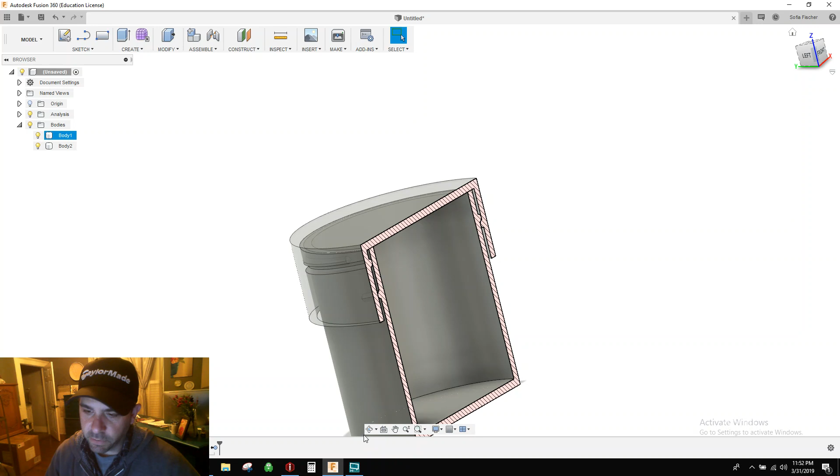So today we're actually going to do custom threads, but using the coil tool in Fusion. But we're going to do something a little bit different, and I'll show you. So a lot of times, when I was doing research on doing custom threads, it was always a positive thread, like say on the cap, and then a negative thread or a channel for that positive thread to go into. And most of my stuff gets 3D printed, and most of those will work a little bit after you do some tweaks and tunes.

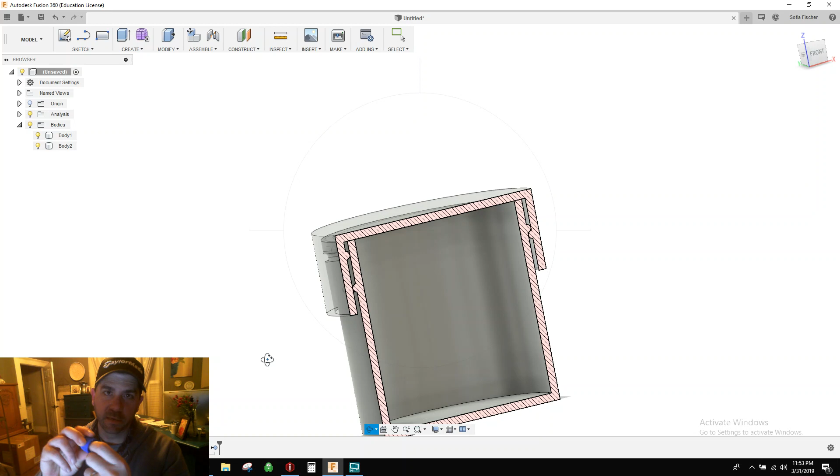But after looking at some threads on like a soda bottle, what I noticed was that both sides, the bottle side and the cap side, both had positive threads. There wasn't a positive thread and then a negative thread or a channel on the bottle side. It's really just two positive threads, and they're threading themselves together. And it makes a really tight seal, makes it a really smooth thread mechanism. And so I'm going to show you how to do that real fast.

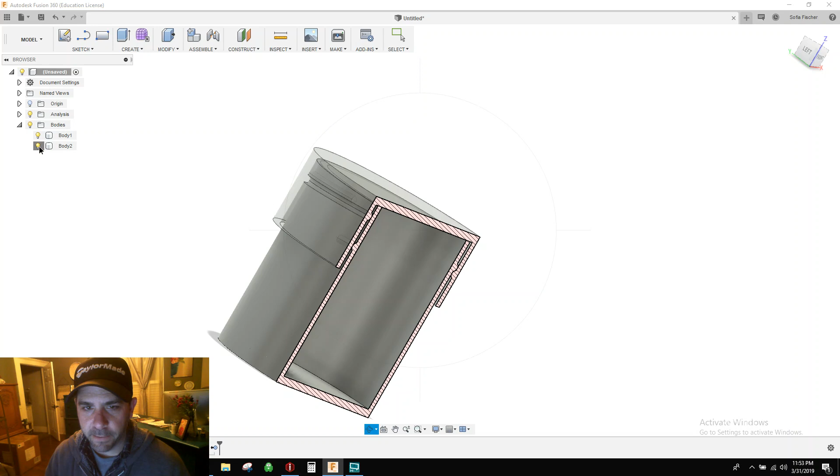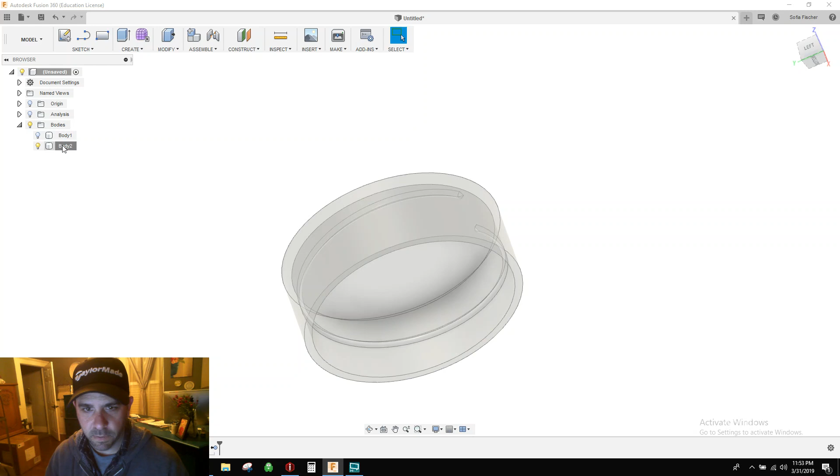So this is just a little test piece I did with a body and a cap. But really, what we're looking at is this positive thread here. So this is just a one-turn thread, and I'll go through the process here on how to make it. So you can see here, this is a positive thread, and then if we look at the cap, let me change the opacity on this. So there you go, and so then you can see that this is also a positive thread.

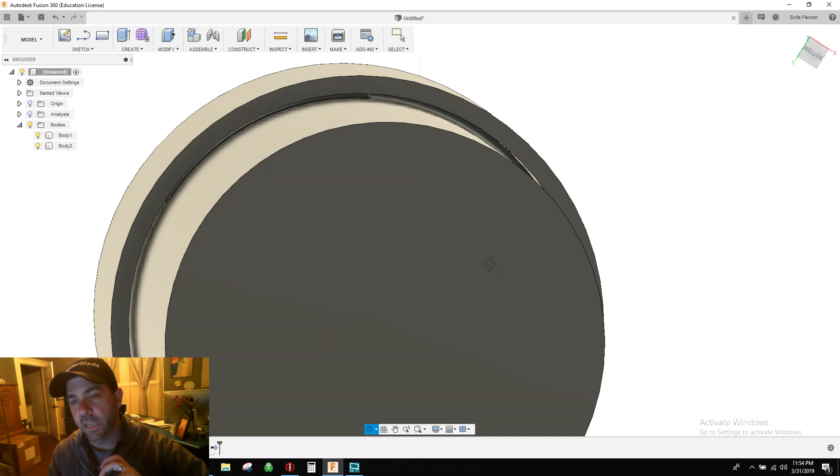And so essentially what I've done is I've just scaled these two, or sized them, so that the outer cap fits completely over with a little bit of space for the threads. And it's not a super snug fit from a cap and bottle perspective, but what gives it that snug fit are the threads really wrenching it down and keeping it together, but it makes it easy to come on and come off. So here we go. We'll just start a new one. Like I said, this is going to be a quick tip and sort of a follow along thing, so I won't go through a lot of explanation.

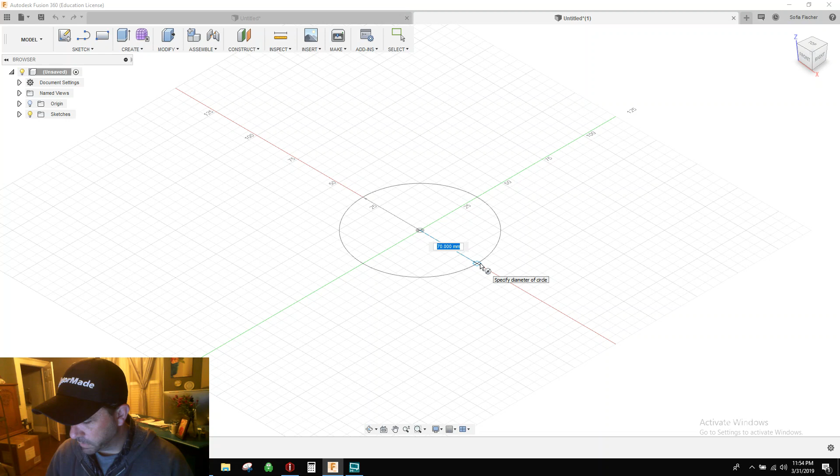So we're going to create first a cylinder. So we'll create a cylinder on this bottom plane, and I'm just going to make it a standard 50. And I'll go ahead and make it 50 high and hit OK on that. And then I'll go ahead and shell this right away. So to shell this, if you don't know already, you go modify and you go to shell, pick this top, and I'm just going to shell it to 2 millimeters, so I have a 2 millimeter wall on it. Hit enter for OK.

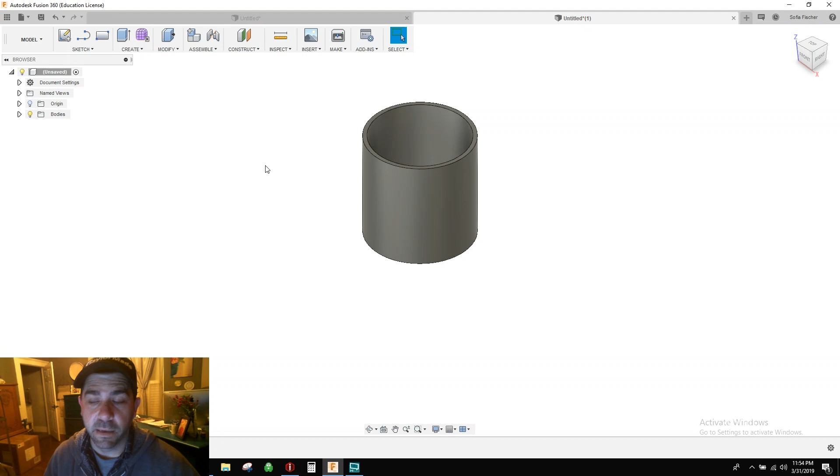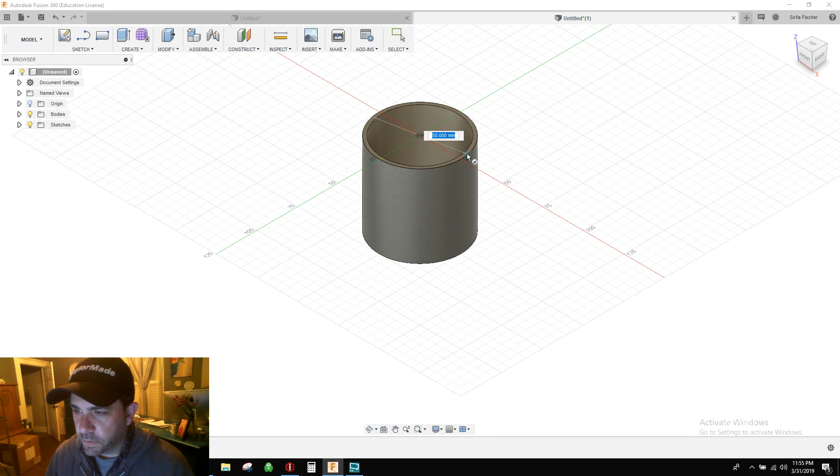And now I'm going to go ahead and make a cap. So I'm just going to do another cylinder. It's going to be slightly bigger, and I'm going to do it right on this top plane for now. So we did some pre-planning a little bit, right? I know that my threads are going to be 2 millimeters each, so there's going to be about a millimeter overlap. So I'm going to make this 50 plus 1 and then a 2 millimeter wall, so this is really going to be 56. And how tall do I want it? I'm just going to make this 20.

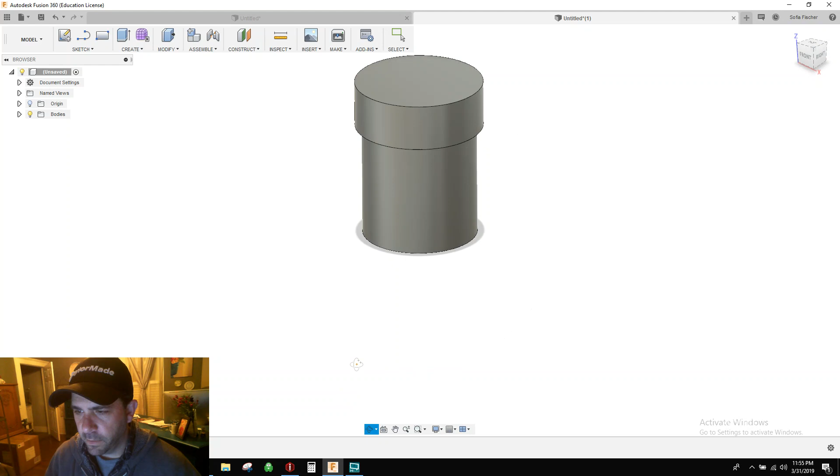And I'm not going to join this. I'm going to make this a separate body, so a new body. Actually, that's how it's going to stay. And then we'll go ahead and shell this as well. So why don't we hide this first body? We'll just turn off body number 1. Let's shell the bottom of this. Same process, shell 2. Okay.

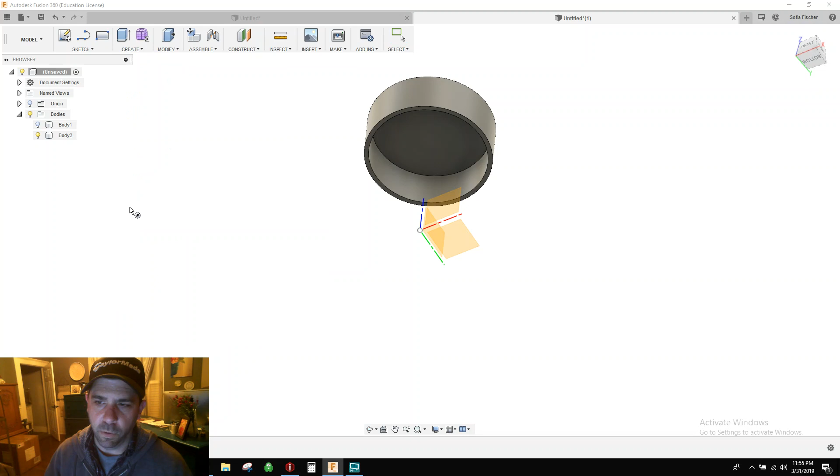And so we'll just go ahead and coil out this first one. So we're going to go create coil, and we're going to do it on this inside plane here. I'm going to orient this down all the way to the bottom. And it's just going to be right into that 52 millimeter first wall. And so you can tell already this looks a little bit funky. It's huge.

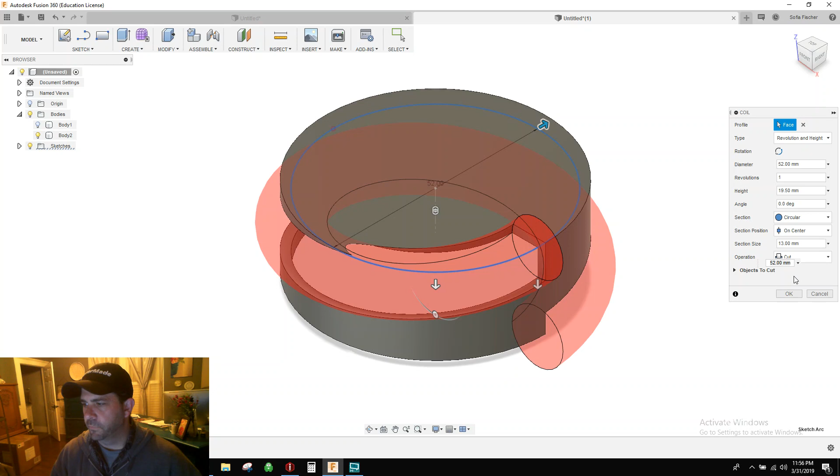So first thing we're going to do actually is change this section size to 2 millimeters. This is going to be a new body to start with. We'll join this later, and this is important for now. And the number of revolutions. So at this point, this is just 1 revolution. You can see the start and the stop is basically at the same point. So let's just go 2 revolutions on this.

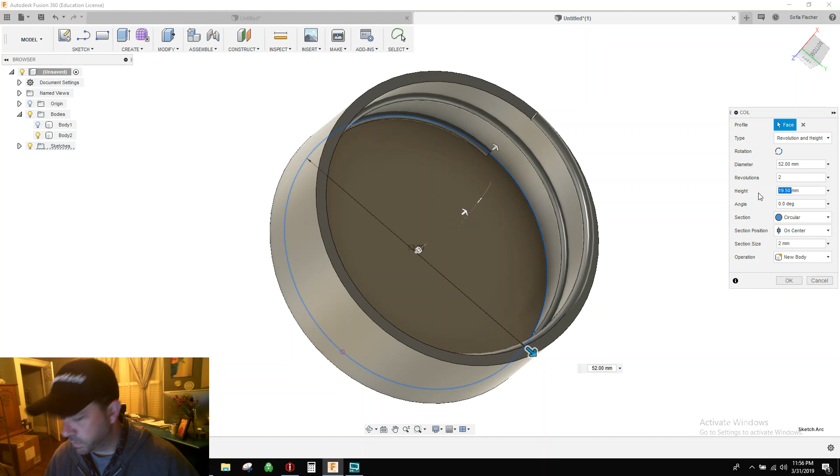A little slow. Come on. 2. And I'm going to make the height, we'll just make the height 15. So remember that. So we're doing 2 revolutions, 15 height, and section size of 2. So this is important because you're going to duplicate these exact same settings on the other piece that you're going to do. So new body, let's hit OK.

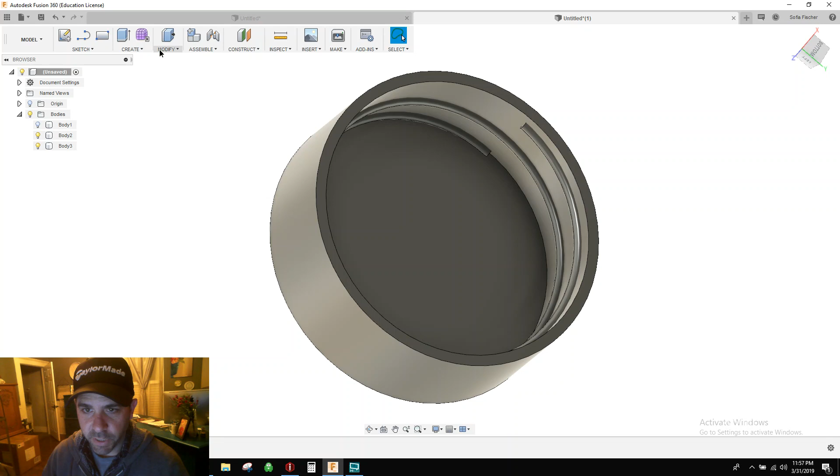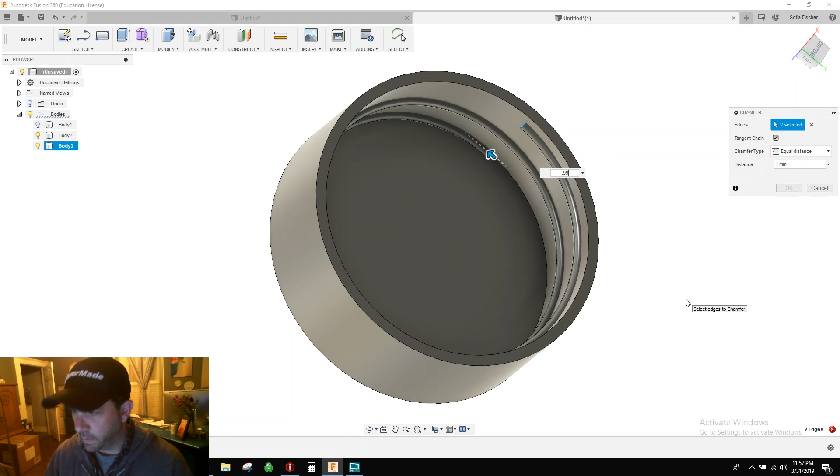And then I like to go one more step here, and let's just chamfer the ends. So we're going to pick that end, hold control, pick that end. And I'm going to say 1, but you'll notice we'll probably get an error here because math is hard, apparently. So we get an error down here saying we got a failure. Whatever, divide by 2, can't get it in there, 0.99. Look at that, it works.

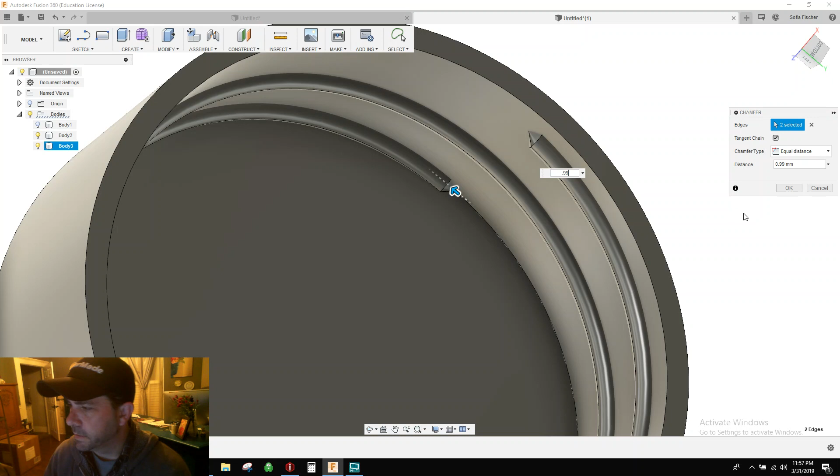This was a little tip I actually picked up from Adafruit, doing a similar video on threads, but in chamfering. And so if you're doing exactly half of the diameter of the pipe or of the coil, sometimes Fusion doesn't like it. So you go 1/100 less and you're good. So there we go. And let's change the opacity on this just a little bit so you can see. And let's reorient this to home.

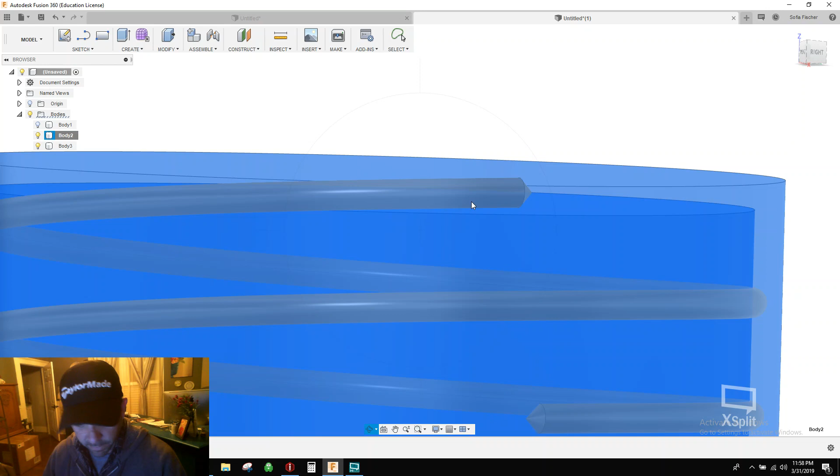Now the only other issue here is, you can see this coil is right up there in the top. And so it's basically cut off and not doing much there. So why don't we go ahead and move this down. This is why we use this as a separate body. So if we right click here and say move body,

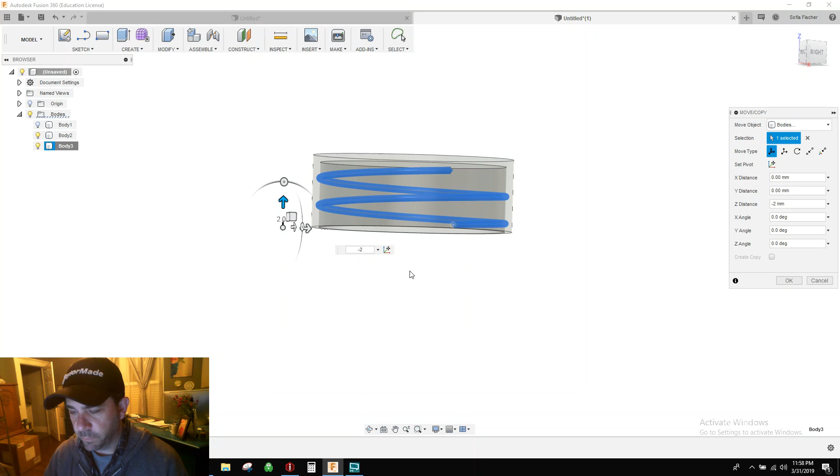we're going to make sure we're on the coordinate movement there. So we're going to move the vertical up down, and I'm just going to go -2 millimeters. So now I'm down below that surface, which is good, and I'm still not poking out of the bottom, so that's all right. Hit OK. So now you can see we are in good shape as far as that's concerned.

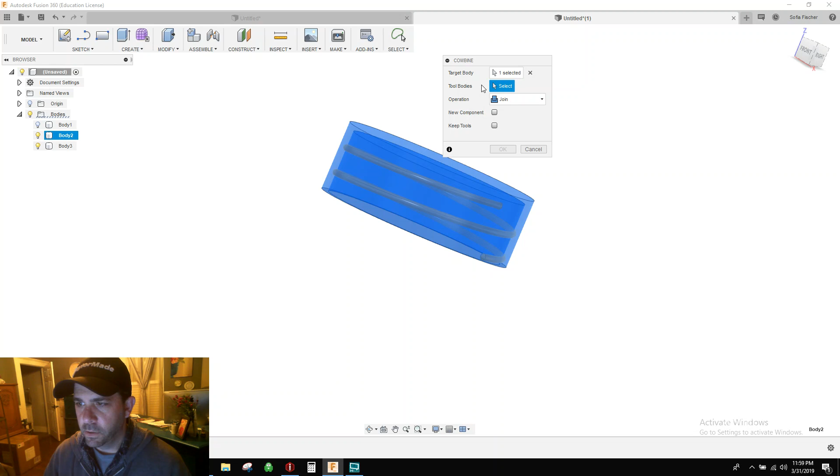So we can actually, at this point, combine these two. So why don't we go modify and combine. So right here, we're saying your target body is your cap, the actual cap, the first body. Your tool body is the thread or the coil. And in this case, we're going to join them. We don't care about keeping tools or anything. We're just going to join them together. Now you can select keep tools and it'll keep that coil later on if you want to, but in this case we don't really need to. So now there you go, we have 1 body all set to go.

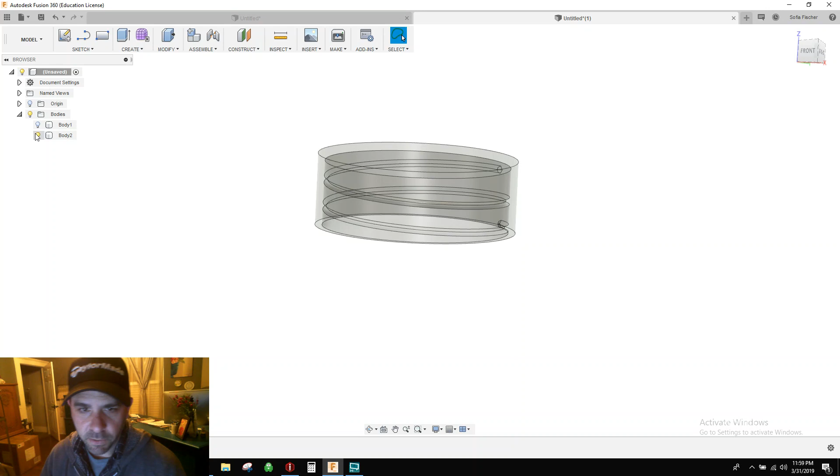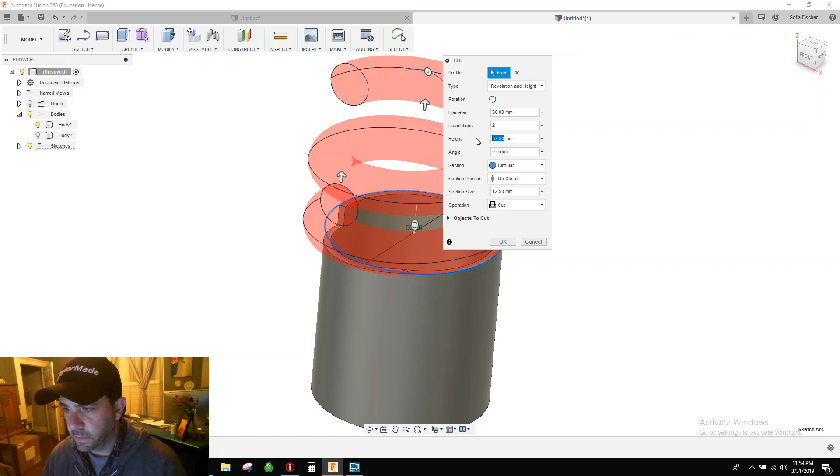So now we're going to do body 1 here. We're going to hide this guy. We're going to do the exact same process. So create coil, we're going to do it on this top plane, and we're just going to come out all the way to the outside here, all the way to 50. And so again, we're going to do 2 revolutions, right? Our height is going to be, what did we say, -15. And our section size is 2 millimeters. So there we go. And in this case, we're going to do the same thing. We're going to say new body.

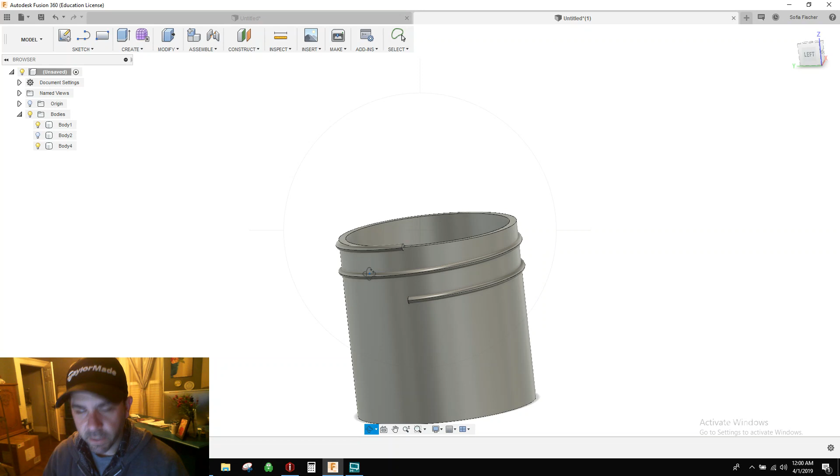Okay. And so we want to do the same thing as far as moving that coil down, because you can see it's sticking up here and it's kind of funky. It keeps it from making a good seal. So let's right click on the coil body, move it. And again, we'll pick that. We're going to say -2. So now we're down just a bit.

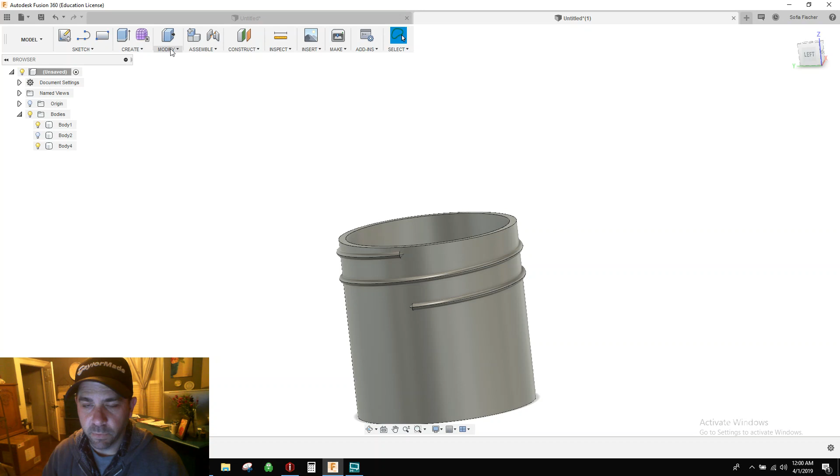Let's chamfer those ends, modify chamfer. Select that end, control, select that end, 0.99. Good to go. And now let's go ahead and combine these together. So we're going to do a modify and combine, and our target body is that, and our tool body is that, and OK. So now we are set to go.

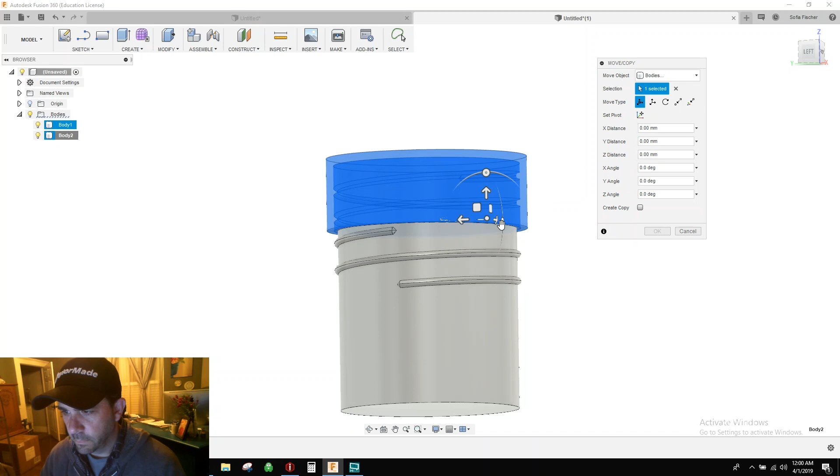So now if I bring this on top, you can see that it's resting on the top. So why don't we move body 2 down. And let's make sure we get all nice and lined up here. And OK. So now you'll see there, and I made the top portion sort of see-through so that we can see what's happening with the threads.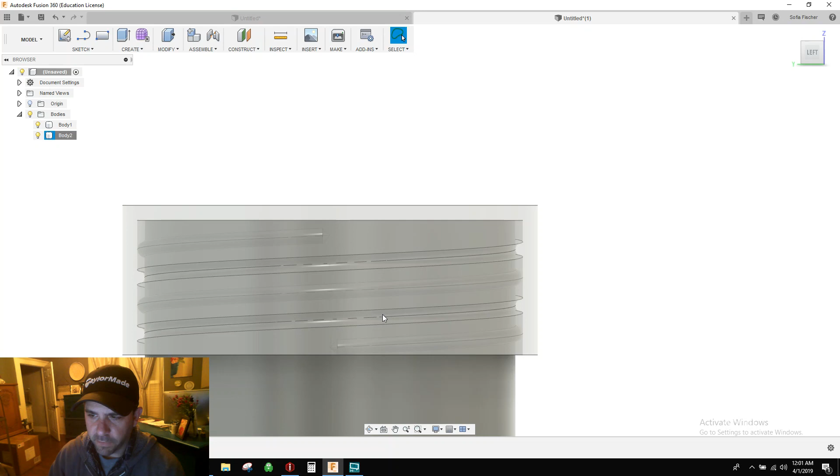So you can see this thread here is actually the thread on the body. This thread here is the thread on the cap. And you can see how there's a gap in between, but that's okay. Because actually, if we rotate body 2 around a little bit, we go to move again. This time we're going to hit the rotate. We're going to rotate on this axis here.

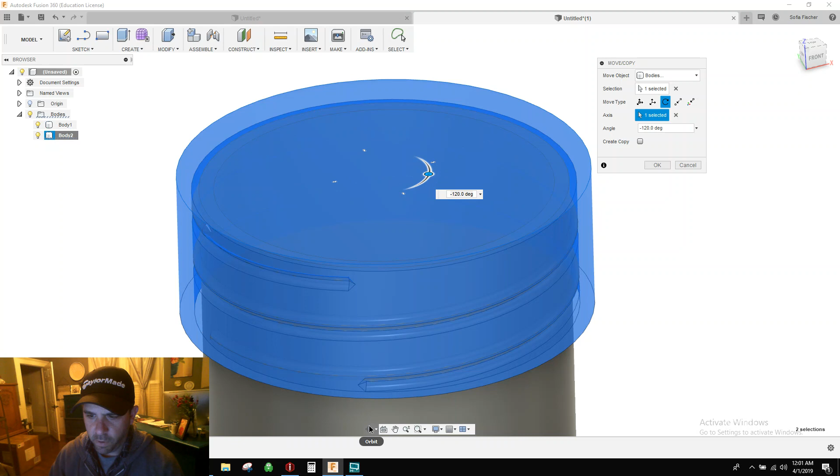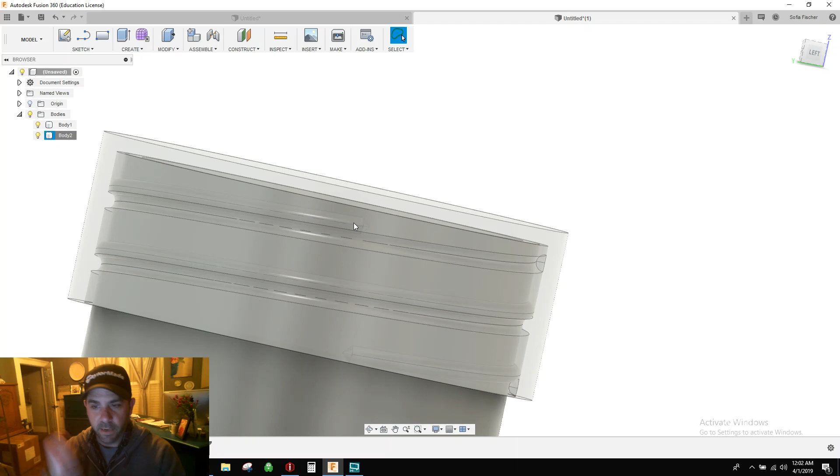But if we start to rotate this guy around, you can see where these threads start to meet. And so there you go. So they are nice and snug. Let's hit OK here so you can see it. You can see now you've got both positive threads snugged up right next to each other, and you've got space here for these things to come together.

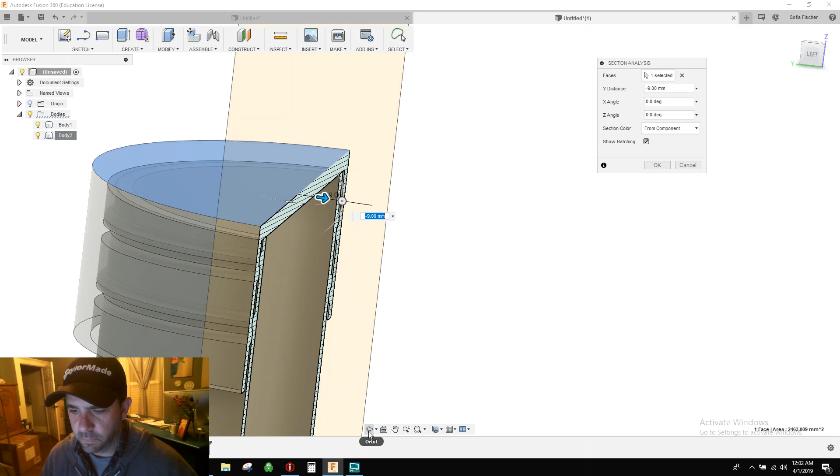And why don't we turn on section analysis so you can see this a little bit better. And go just like this. Move here, pull this out. And you can see here that your threads are all good and lined up, and it's nice and smooth. You're good to go. So there you go, quick tip for you.